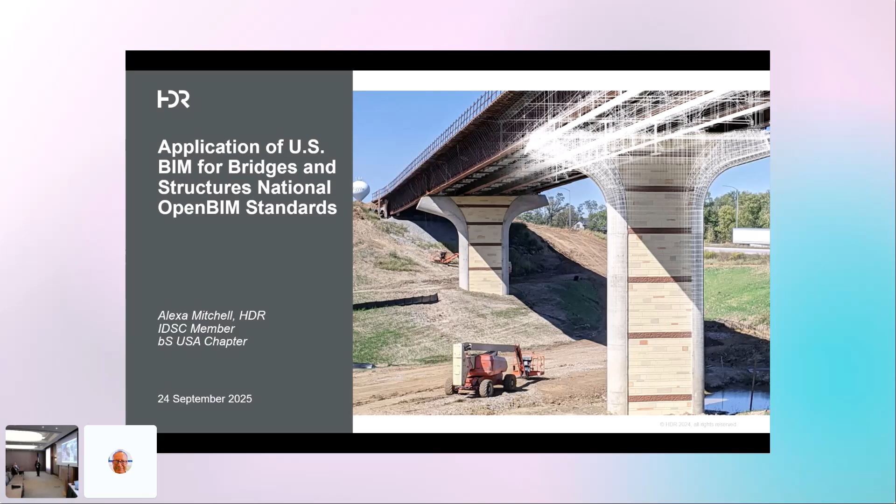All right, so over the next 30 minutes or so, I'm going to be talking about the U.S. vision for a national standard that we are trying to deploy, practical application of how we are testing those standards today, and what we are doing to develop an openBIM workflow that we can share with all of our stakeholders. The idea is that this workflow would work for all types of bridge projects that are kind of the bread and butter of what we do in the US, which is maintenance work. So bridge replacements, not fancy mega projects, right? So 80% of the work that we do in the US is reconstruction and maintenance site work. And then I'm going to share some of the key outcomes and lessons learned to date because we are still doing the project. And so we'll share as much as we can.

All right, let's start with why are we even doing this? I think I can say that we all have a common problem. And the problem today is that all the people doing projects in the design, construction, and even the asset owners currently use proprietary software, and it's very difficult to share information with one another if we're not using the same technology stack. And so we want to get to the point where we can choose whatever software of choice we want and still be able to provide the quality files that go downstream to the next stakeholder in the life cycle of the project.

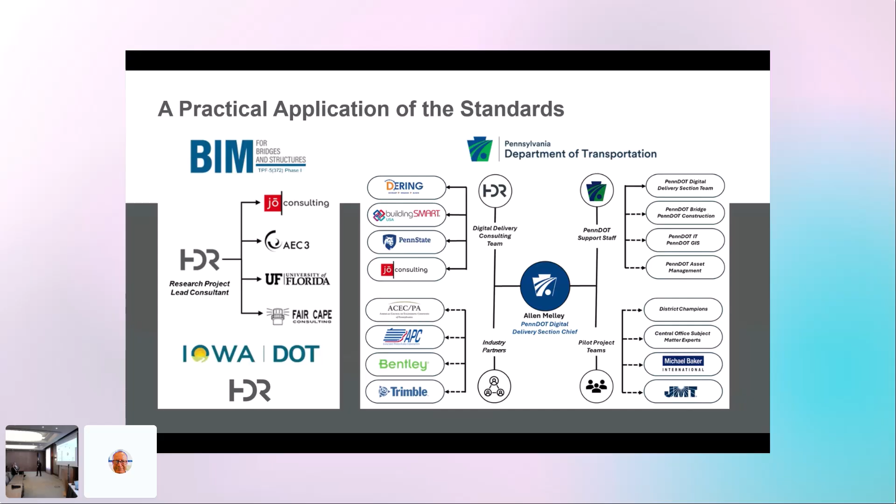All right, so how did we get started on this? We started with education. Like I mentioned, we're very new to BIM and openBIM in the bridge community, and we don't have a lot of resources in the US that can help us educate at large.

So we took advantage of the buildingSMART accelerated program to hold a series of webinars and a workshop where we brought the project teams together. We brought the software developers that we typically use on those projects, or that the department had chosen to use for delivering them, together with the project managers. So not only the technical team, but the project managers and all the stakeholders, to educate them, because there are different audiences when you educate people. There are project managers who need to understand why we're doing this, why it's important, why they need to support it, and what they need to ask for, so that they get what they need. It was really, really helpful, and we got a lot of value out of that.

So that was step number one, the education part. We were able to go through the entire generic digital workflow, creating IFC files, validating them, and then taking the IDS and understanding what an IDS was and checking those requirements.

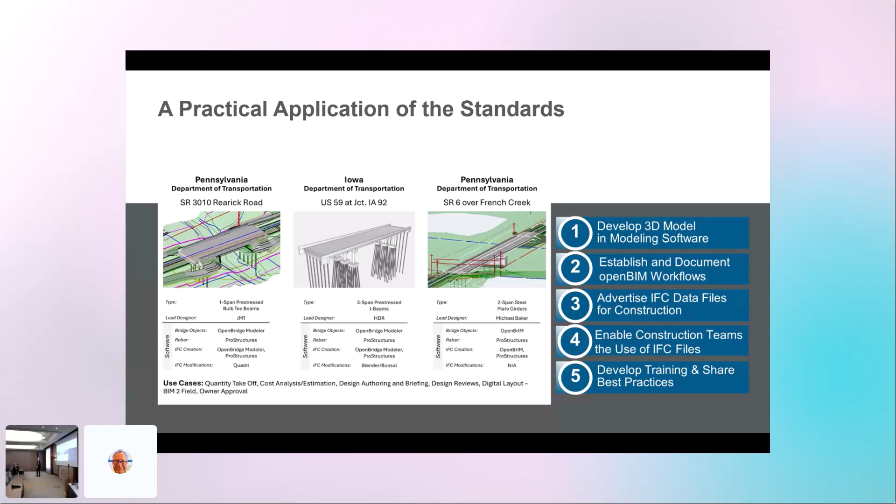And through that process, we're developing training, and we want to upscale the training to see how we can deploy that at the state level first, and then national and international. But all of the documentation is going to be shared. And the Infra Domain Steering Committee met on Monday, and we really are looking for opportunities to gather examples, files, documentation that we can all get a hold of and analyze to see what are the commonalities and the differences.

All right, so now that we know what we needed to do, what did we actually do? So part of the Transportation Pooled Fund for the standards put together a very high level workflow. And I say very high level - this is step 1, 2, 3, and 4.

We provided this to the teams to help us understand how you would have to follow this high level workflow of developing the model, adding the requirements to the IFC objects, preparing a file that would pass the validation service, go through the process of iteration in the validation service, and then test the files against the IDS to check for compliance on the information requirements so that we could feel confident that the contractor was going to have what they need to do the work.

And so high level, and then the next step is to, okay, so how does that work in each of the software packages that the project teams actually used? And it was different for every package that we used. And I can tell you, it wasn't easy.

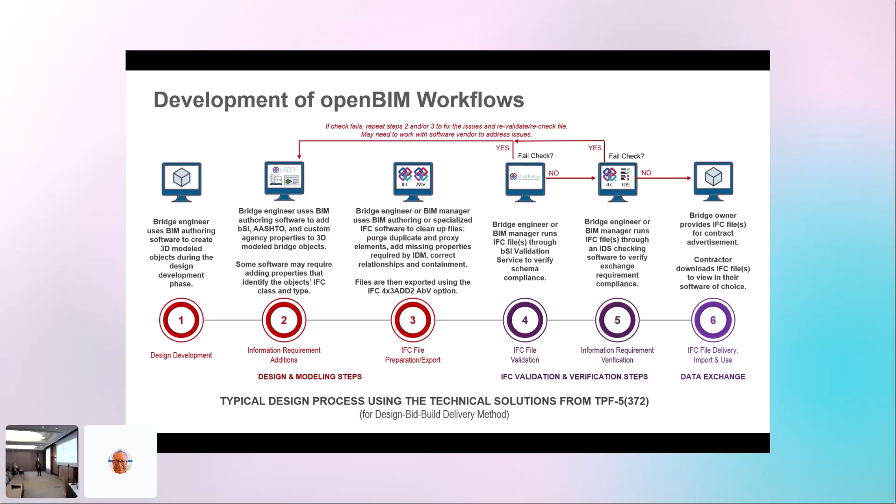It wasn't easy. So we have this expectation as engineers that you can create your model, push a button, and the IFC automatically comes out and it's perfect. Okay, that is the expectation. It's not. It's not that, right? Not saying that it cannot be done. It can be done.

But I think it's important to educate people that it takes work and you need a little bit of investment to bring people that can help you analyze the file, set up the software, configure the software correctly so that you can get the information that you want. And if there are challenges, how to work with your software partners to make it better.

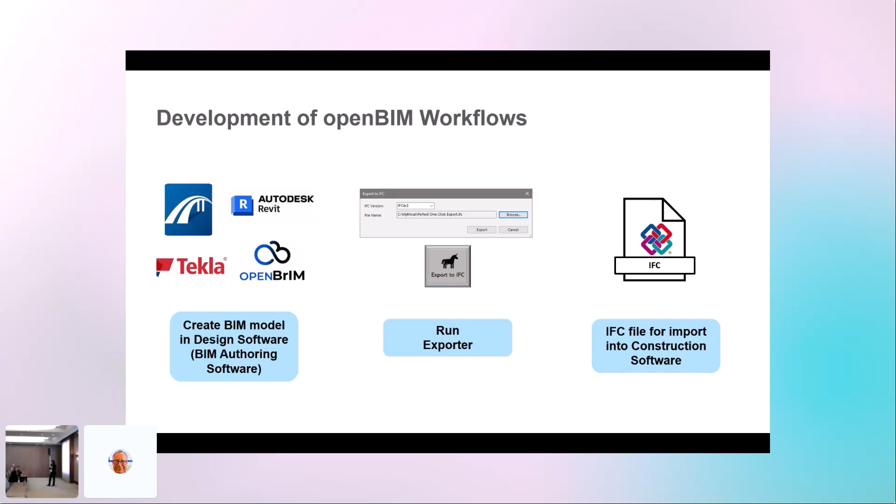Short-term solutions, long-term solutions, we take it all. It's been great working with our software partners, very committed to helping us find solutions, because these are real projects that had to go to bid in a short amount of time. The number one priority was to make sure the project was delivered, not that we did openBIM. It so happens that that was what facilitated the delivery. I just wanted to mention that.

So we really went through a very elementary type of education. You have your geometry. If you don't set up your objects properly with the proper classification and the proper properties, then you're not going to get what you need on the other end. This is just a visual example of that. We often see this building element proxy, and that's what we want to eliminate. The standard allows us to walk people through what we want to see at the end.

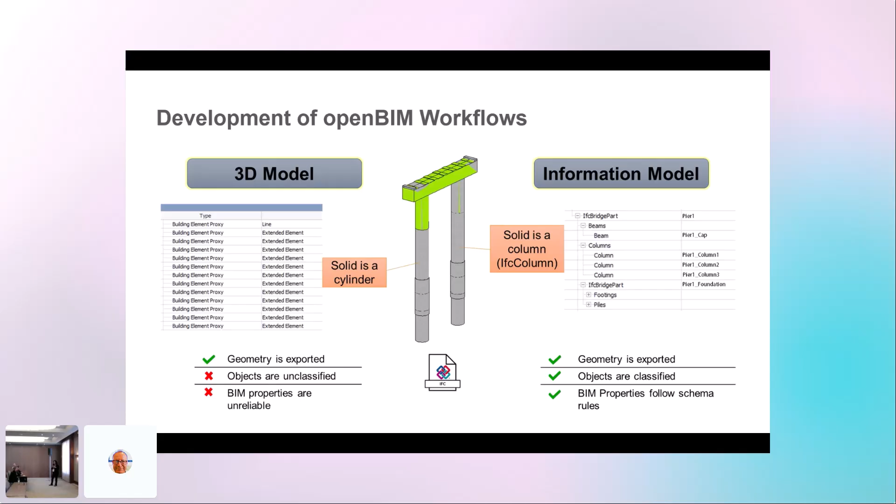Let's be real, like I just said, the standard is still relatively new, and there are still some challenges with the alignments and different types in 4.3 that are important for infrastructure projects. So I think understanding the IFC readiness for different types of products is very important.

I can't emphasize enough how important it is to truly partner with your software partners to make it work, to understand how the software works in the background so that you can configure it appropriately. You may have to do more work in some of the products and not as much in others. It's about being able to have that very frank discussion with your technology partners.

The data conversion really depends on what software you use and what version of the software you use. This was all new for us, and it may not be to you, but it really was for us, and it was very eye-opening, because we've been hearing for years, oh yeah you can do IFC, there's lots of projects around the world delivering IFC files, and I'm like, can't be that hard, right? Well, now we're finding out that it takes a lot of work, but it is possible.

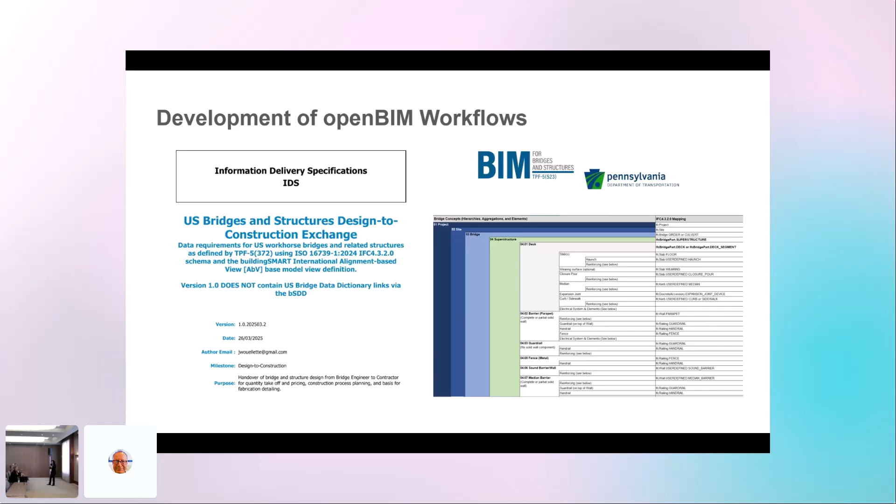But we had something to start with, and the idea that came out of the pooled fund is a template, a national template, with the idea that it helps all the DOTs at the 80% level. It's expected that each state may add content and requirements to the IDS, and then project teams may do the same. We would like to provide a template to start with, because all the states have similar projects, similar types of bridges, and a lot of the same suppliers. So a lot of it really applies to all the DOTs. Very flexible.

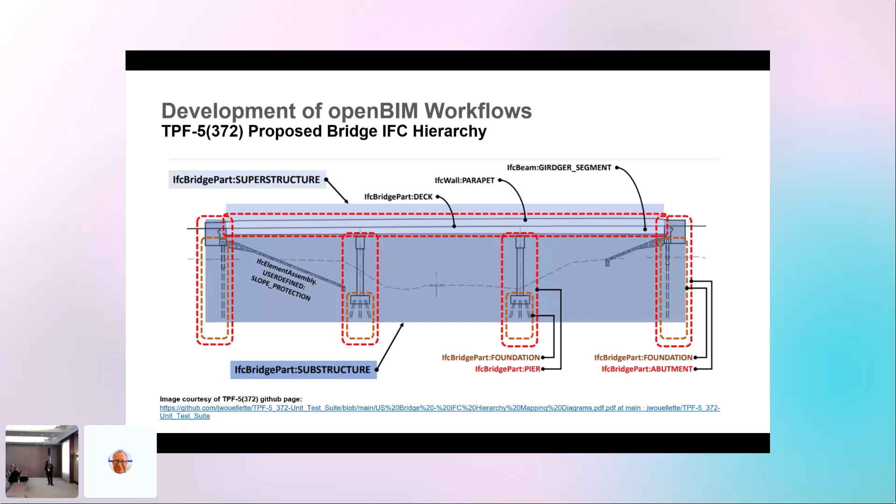We started, of course, and I like to talk about standards in a kind of pyramid style. You start with the international standard, and we try to use as much as we can out of the schema itself and all the relationships. Then we have the national standards, the AASHTO, and we've come up with a number of those properties and property sets, and we're finding out that maybe they were already covered in the IFC schema. So we're doing a lot of comparisons on how to make it more lean and take advantage of what's already been done.

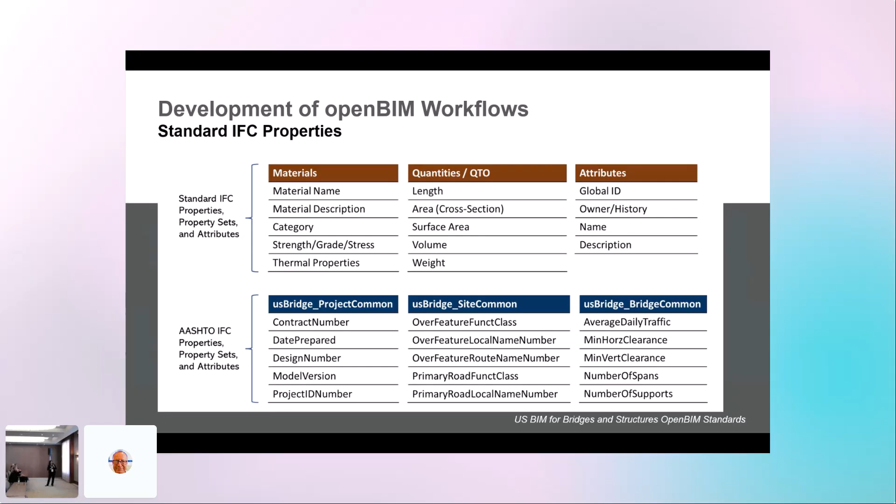And then on top of that, we had things that were very specific to PennDOT in their workspace within the Bentley software, and added some more things. I'm going to rely on Joe a little bit here later if you have any questions. But we worked together with the DOT, and the DOT had already really good OpenBridge Modeler standards. So it was just about how do we make those standards now align with the IFC deliverables.

So this is just another illustration of the things that we were teaching people: class types, custom properties, standard PSET, spatial mapping, and let's convert it to IFC, and then let's go to the next level.

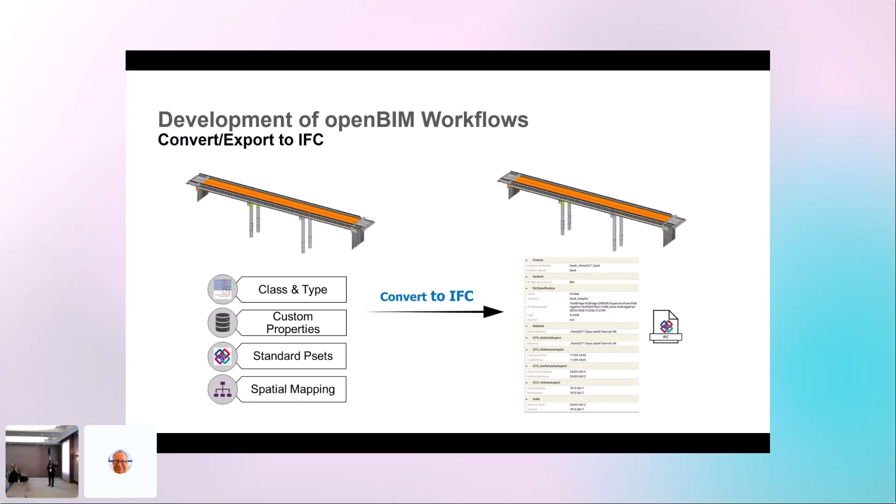So as we get more deep, we test the file. Lots of errors, maybe no errors, lots of errors typically, right? And that helps us understand what are errors, what are warnings, what are some of the things that we really need to pay attention to. Is it because the engineer didn't set up the model correctly? Is it a software problem? And so you start really digging into it. You correct the issues in the file and retest and continue that iterative process.

And then once one passes the validation service from BSI, at that point, let's move to the IDS checks. And so these are just some screenshots of some of the documentation that we had, the test files you selected. You click. It's very easy to use the validation service. If you're not familiar with it and you haven't tried it, we do encourage you to try it. We learned a lot about what those errors and warnings meant.

Again, the different categories of errors. This just illustrates that we went through the steps, and so we do have those examples now. We have reports that we can share.

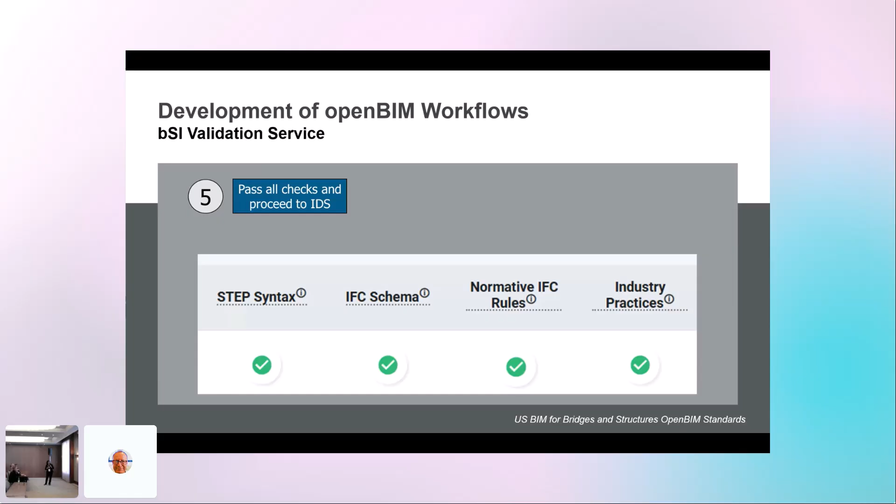And iteration, until we get to the point where we are passing the things that we need, that are important for that work. This is an example of the IDS that we have. So, like I said, we ended up with a large template of the IDS that has, I don't know, 30, Joe, help me out, maybe 30 specifications in the IDS. So it's very large. So we are learning, and we're going back to update it to take away some of the things that are not relevant, and leave the things that are more relevant.

All right. Key outcomes. The workflow. I know it's small here, but we used a lot of different software packages in this. So 3 teams, different packages, and a lot of great collaboration. I'll just say that, right? But we had the authoring software. We were able to export the files. We had to use third-party applications to clean up the files,

and then deliver the files. When we go to construction, of course, the construction teams have other preferences for what software they want to use. But the key here is that we proved that you can use many different applications and still be able to deliver your project with the same design intent. But at the moment, it does require quite a bit of work. So I just wanted to highlight that.

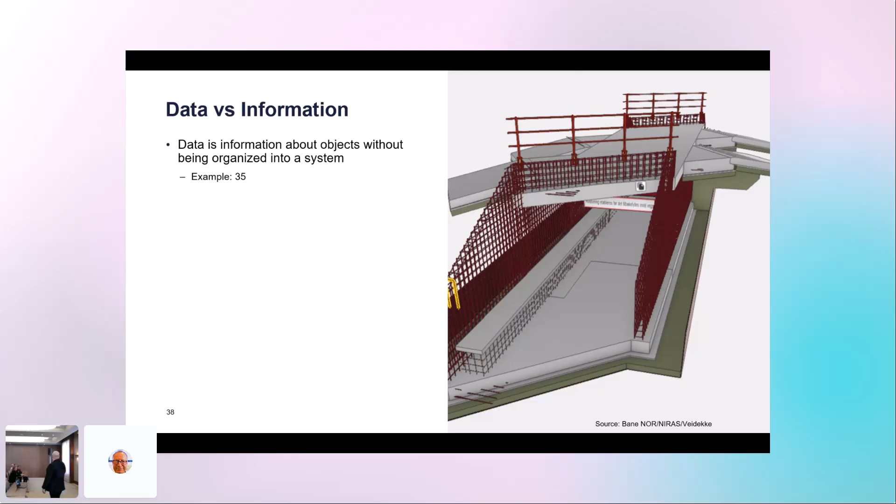Data versus information, what's the difference? If you look through dictionaries, data is information about objects without being organized into a system. If I just give you 35, what can that be? It can be 35 degrees, but that can be in a circle, it can be Celsius, it can be Kelvin, it can be Fahrenheit. We don't know. It's not set into a system or context. If we put it into context and a system, we can say concrete cover, 35 millimeters. Too little for a bridge, more than enough for an indoor construction. What I've done is I just added the context for what that number represents.

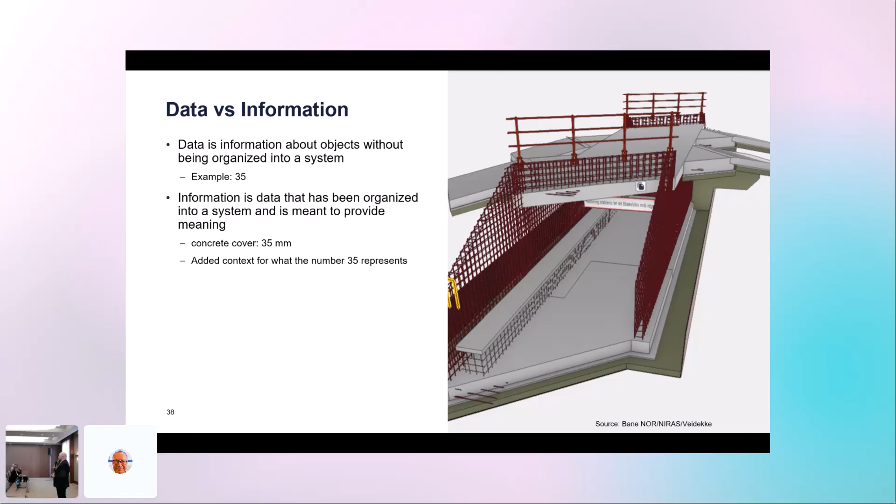And if you go to the Oxford Dictionary, it says that data is just bits and bytes, more or less, and information is data put into context and given meaning. I think that's the most important thing. Information gives meaning. So when we are talking about good data quality, we're actually talking about good information. I think we just have to remember that. Usually we talk about both things on and off, but we're talking about good information.

So why is good data quality important? We get better decision making. Why do we have to have that? The better we can make the decision, especially as an owner. I have 4,500 kilometers of mainline track back home in Norway. With limited funding for maintenance and operations, we need to have good data and good information to put that funding in the correct places. If that's changing a bridge, building a new crossing, siding, whatever it is, we need to have good information.

We also get efficiency and cost saving. If you have good quality, we can save money by doing the right work at the right time, or instead of something breaking down, we can change it out before it breaks down. We get trust in the information. We know that the information is good. We can use it. We trust the information. We trust the data.

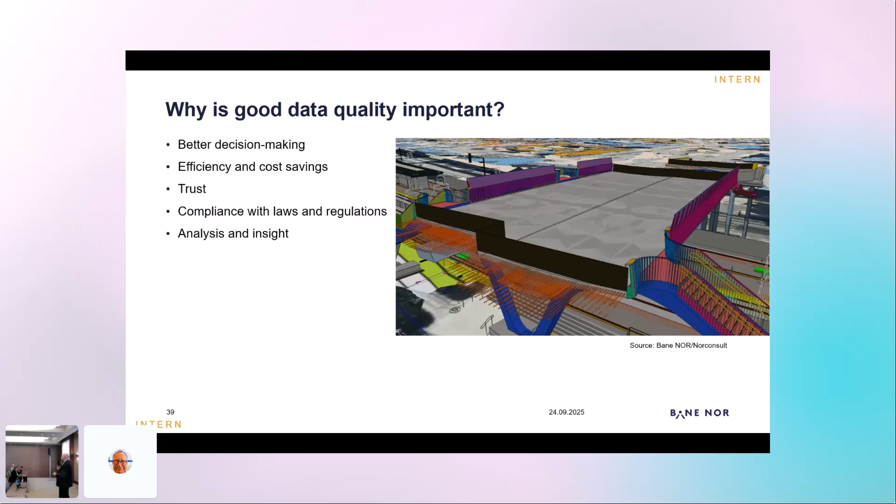And compliance with laws and regulation. The more control and the more I know of the data, I know if we are compliant with laws and regulation. And also analysis and insights. If I have good quality data, I can use a lot more analysis and insights than if I have bad, because I can trust the output of the analysis.

So what do we need to do to achieve this? We need to define what we mean with good data quality. We need to have the quality criteria: accuracy, completeness, consistency, all those things. We need to define them. We also need to have good processes and routines. We need to involve the people, those who are responsible for the disciplines, for the bridge. It will be involving the bridge department in Bane NOR for us to get the correct information they need.

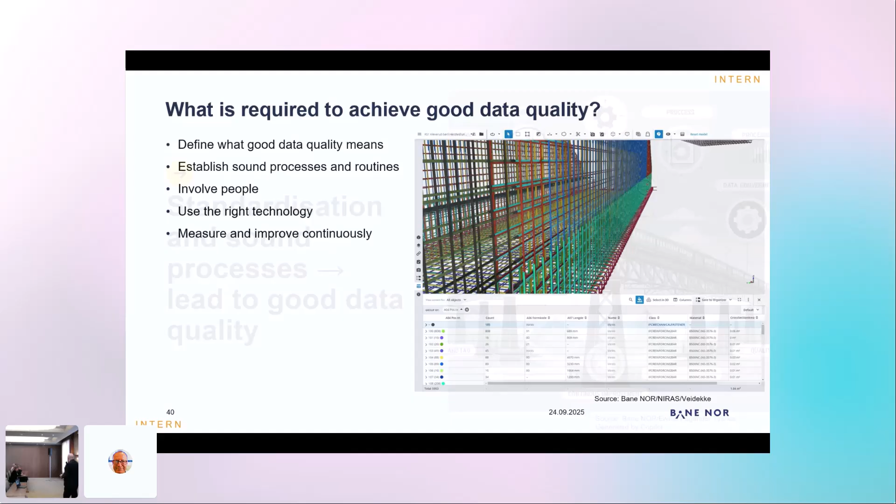Use the right technology, and we have to measure and improve continuously. We can't just define something, finish it up, and then use that forever, because someplace down the road something changes and we need to make adjustments. So, standardization and sound process lead to good data quality. I think that's important to remember. If we have those processes and we have standardized, we will get good data quality.